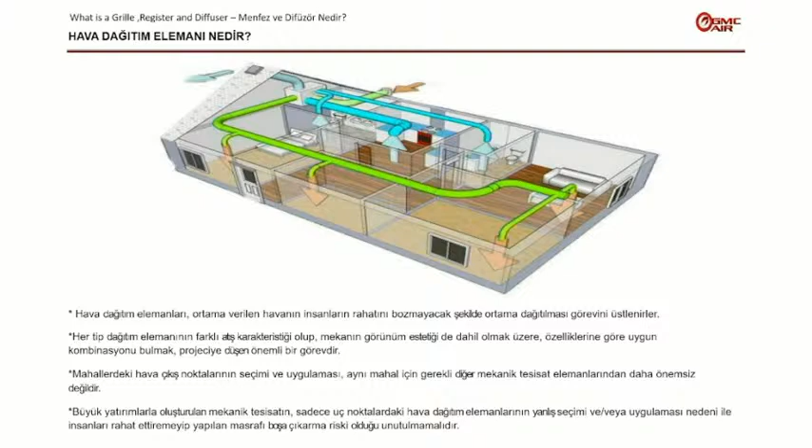It's also not working. For instance, when there's a product to be chosen between grill and diffuser, the choice is made based on refrigeration.

So you can't use this in heating, only for cooling solutions, because you have identified the wrong solution. There are some details here, but I'd like to show you something else.

If you go to many factories, for instance, or to banks, you will see some plexi materials installed in a very ridiculous way. However, they are the wrong diffuser choices. The products are wrong. However, this is how the system was installed.

They have installed a panel, they have installed the cables. However, the blowing equipment is wrong. And the end users give feedback that the system is wrong. However, if the air distribution products were chosen in the correct way, we wouldn't encounter this solution.

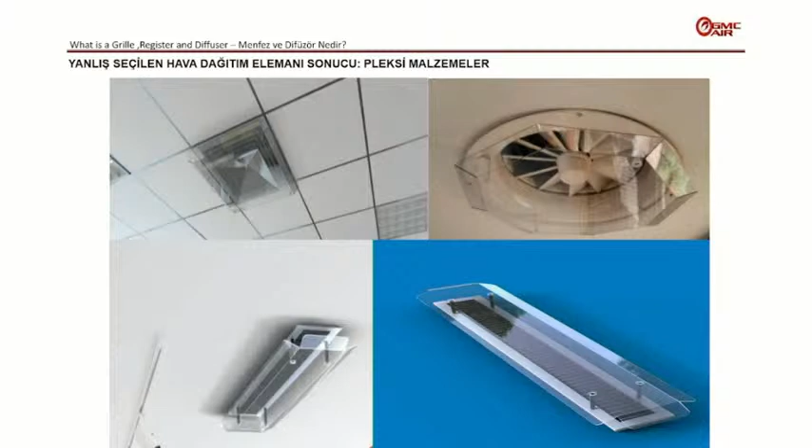This choice of wrong products created this plexi product as well, as you could see.

Let me talk about what a grill is. If there's the right distribution, you would have a grill that is with a right wing. And with the diffuser, if you can change the airflow, then it is called a diffuser. Each one of them has different use places. But when we use register, it is actually a grill with dampers.

For grills, you may have different varieties, different options. There's the distributory, there's the round channel one, many varieties. But if you're not sure where to use which product, there's a risk that the product may not be used in the right place.

One of the most commonly used grills is the one that distributes. This is used for distances of 2 meters, 2.5 meters, and they constantly blow. There's no option of directing this airflow.

So, in many projects, they prefer to use anemostats instead of this double blow. However, using this anemostat is not really ideal for 2.5 meters. Unfortunately, they just use this anemostat as a fixed solution.

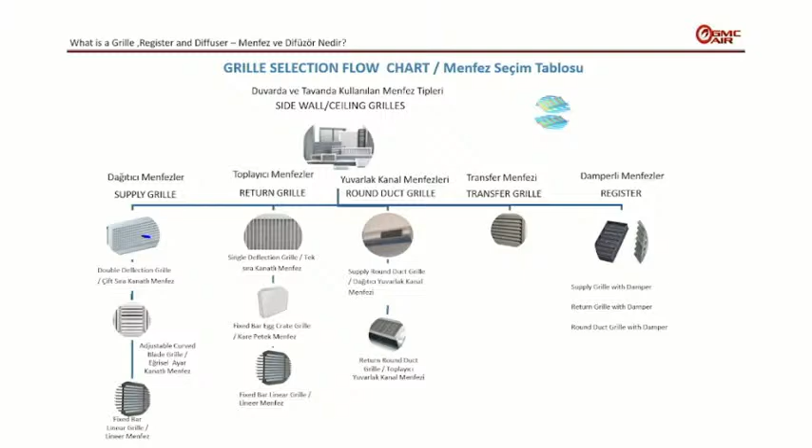And in terms of registers, which are grills with dampers, which I mentioned before, I'm moving on.

These are some adjustable winged grills. In many parts of the US, this is being used in all of the hotels and residential areas, because you can manually adjust these products and change the wings both for heating and cooling and create solutions.

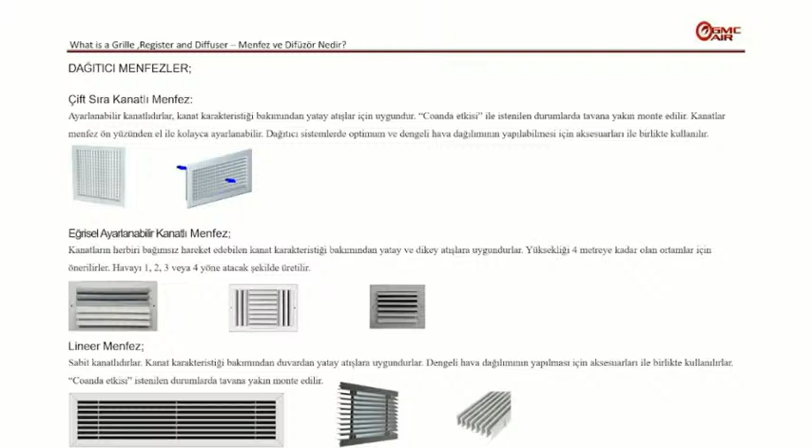However, with the grills with double wing, there's no function to do this. So when we produce for the US market, we use the linear products. This would not require you to use a damper from behind it. If you can just close it, it serves as a damper.

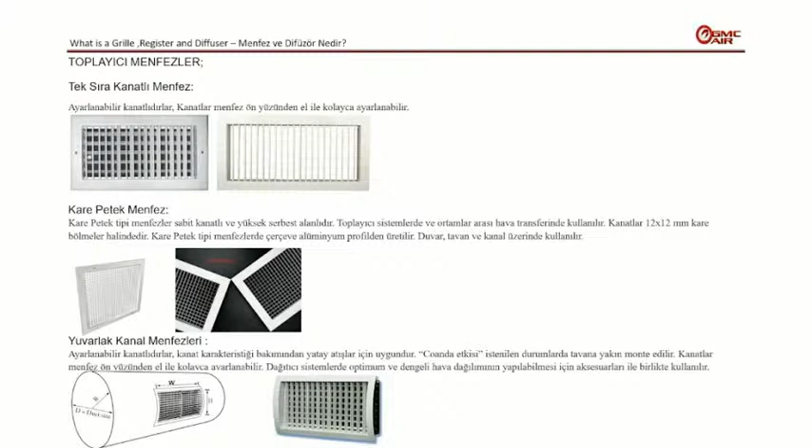And these are the grills that are collecting within the market. This is fixed. If it doesn't provide air distribution or a direction to the air, then it's a grill. If it provides a direction, if you can direct the air, then it's a diffuser.

So I'll move on to explain why we shouldn't put blow and suction at the same time. There is a Coanda effect, and I'm telling this because you all know about anemostats. When the air blows, there is a certain period when it's just suspended in the air.

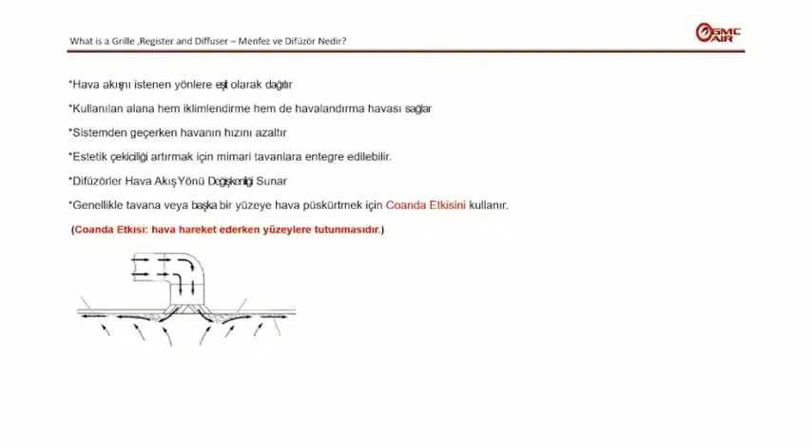And it creates a Coanda effect and directly directs itself. If you don't take this into account, the Coanda effect will come into play, and we should really take this into consideration. This means the Coanda effect is that when the air catches the surface, it continues along that surface.

And here you can see the diffuser selections, which can change from company to company. So there's the horizontal blow ones and the radial ones for high ceiling solutions.

In order to get the air from a high ceiling to down, you need to create turbulence, and you would see that high impact diffusers would be the right solution for that type of space. With these type of products on the right hand side, you can then bring the air from the top to the bottom if there's a high ceiling.

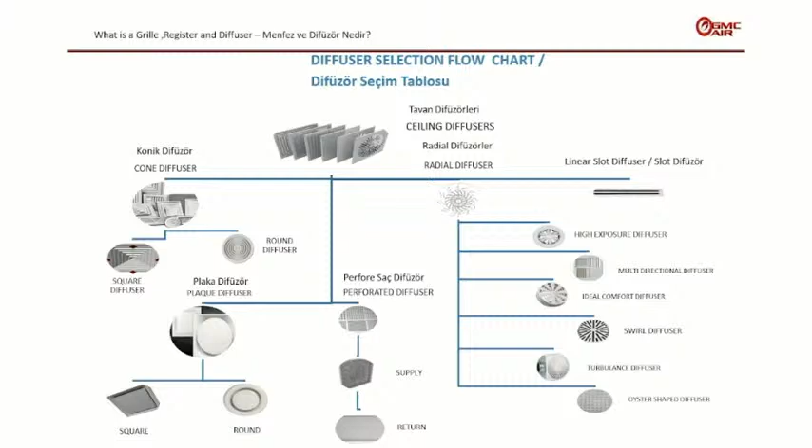If you cannot change the wings, you cannot use the same system for heating, and the Coanda effect will come into play. So when making these designs, please take into account that the grills or diffusers can be adjustable to be used both for cooling and heating design.

So I mentioned the slot before. Here's an example of a mistake. Unfortunately, it's hard to say that the slots produced for years have some mistakes, but this is the type of wing which needs to be in the correct way. So one wing can serve as a damper as well, and they can direct air.

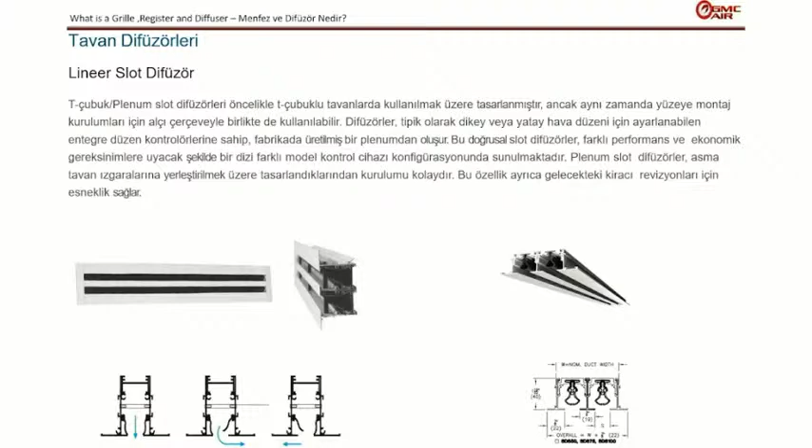We started to produce these, and now we are producing these for the US market. I'm telling you these because we have changed the whole production line, and now we have these products. However, the old ones are also in the market, so I'm trying to explain the differences. We have a lot of information, but we need to change the old habits as well.

These are the type of anemostats that we use in the US market. The key feature here is that even if there's low air pressure, you would have a stable flow. Normally, our products with turbulence wouldn't function, however, this product would be stable.

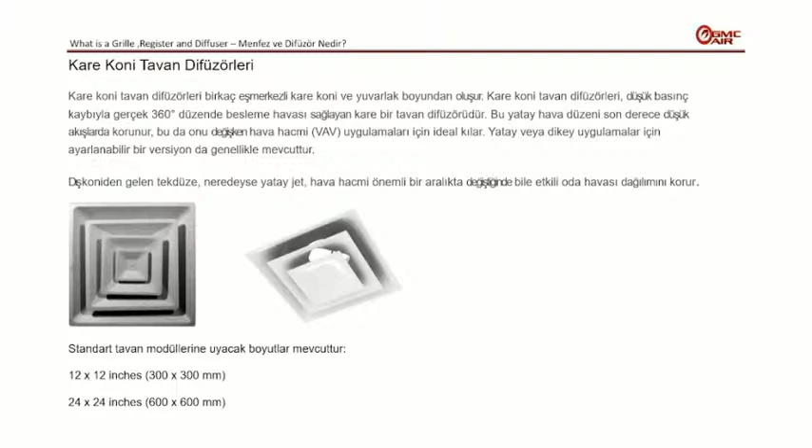And they don't have a plenum box as well. Normally, you would have this box, but they are connected directly from the flexi - directly you can connect this without the plenum box, and you can directly just connect this product from behind. It saves you from costs and leakages. It is sealed, you won't have air leakages, and it's a very economical product as well.

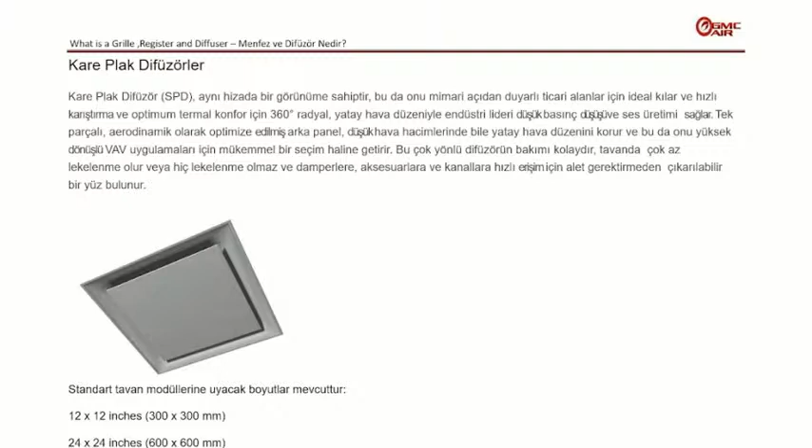And here you have a very flat square diffuser, and it has a capability to produce flat airflow. Again, it is without the box - they can be directly connected to the flexi.

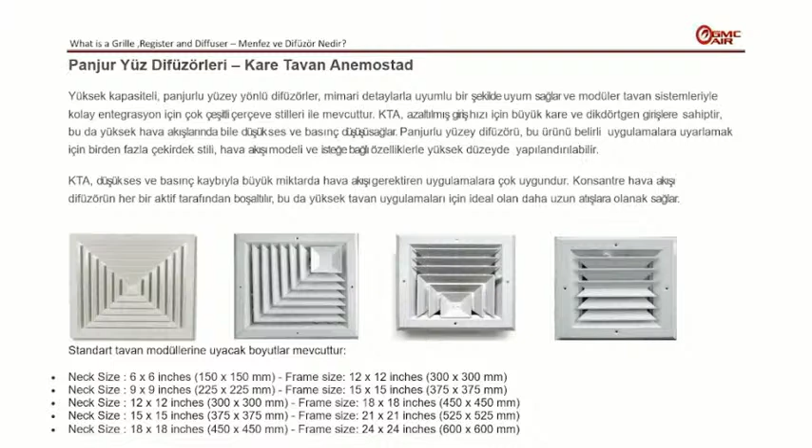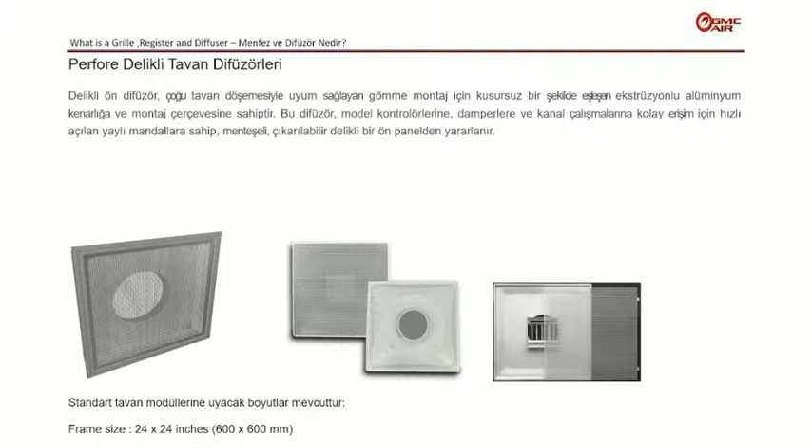And these are the products that we use that are standard and used in the Turkish market - these are the square anemostats. And you saw before, these are the diffusers with holes, and it distributes air in a homogeneous way, depending on whether you cool or heat. The perforated holes create smooth airflow, and again, you don't have the box behind it.

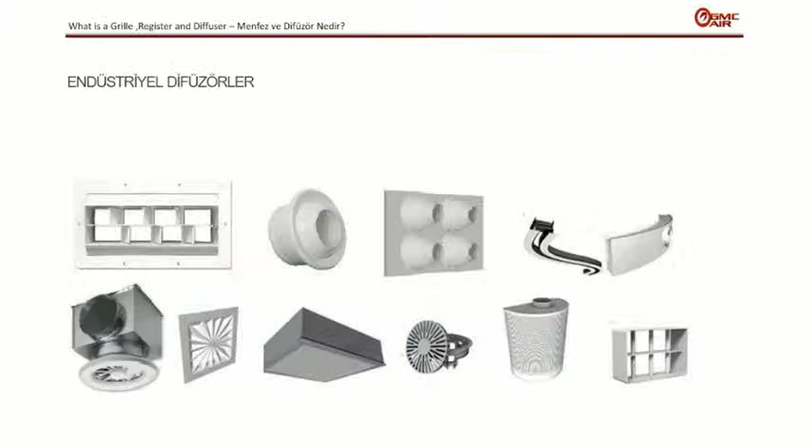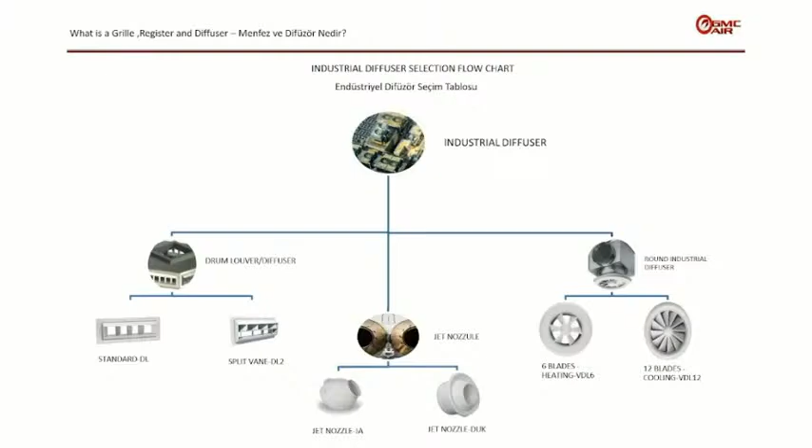Now, here you can see the diffusers we use in the market, and these are the industrial diffusers. There are many varieties we use in the industry, so we produce for the industry as well. These are the jet diffusers, and then you have the long-range products for industrial use. It is possible to use these products in high ceiling spaces. And you have this drum product - it provides a good solution when you have issues in your projects and in high areas. These are continuations of our industrial products.

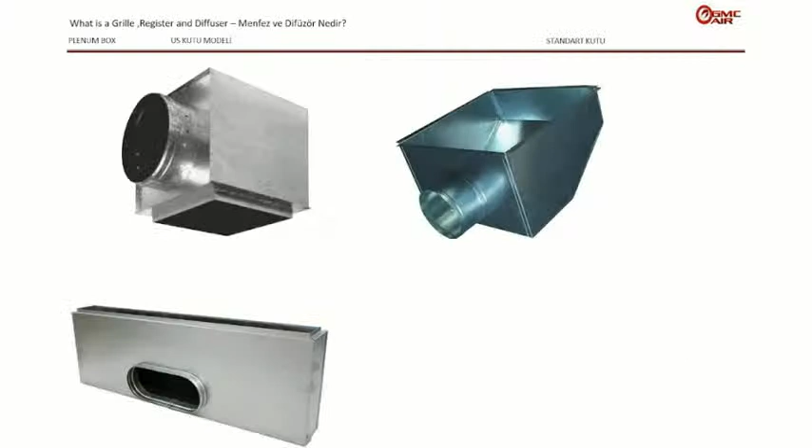Let me add as well in terms of these boxes - normally, how does it work? You put this product, you place it onto the anemostat. However, it's wrong - this is not how it's being implemented in the US, and it produces air leakages. We presented these products, and unfortunately they were rejected, and we were surprised.

So on the left-hand side, it should actually be the opposite, towards the downward side. Unfortunately, no other boxes are produced this way, and they produce 30% losses. In these systems, it is a high loss, so it would create 30% more - less efficiency if there are losses.

The same applies to slot diffusers. Normally, there would be a product, and then these boxes would be placed on top of them, but these lead to air leakages. However, if you did a hole on the sideways and direct it towards downwards, then energy saving can be achieved. Thank you for taking your time and listening to me.

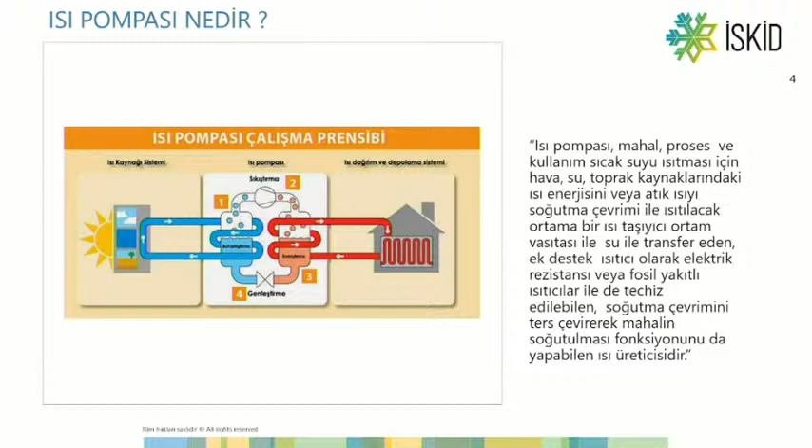Now, if we look at the types of heat pumps, we can say that there are three types: air-related, water-related, or soil-related ones. As you know, in nature, air is abundant and free.

Air-based heat pumps can be taken and used for radiators. The advantage of this product is that the service and maintenance are very easy. Water-based heat pumps use water from lakes or the main drainage as the source. If the location we want to heat is close, we install this inside the space.

Then you have soil-based heat pumps. We use soil to transfer heat, and we utilize heat-changing conduit pipes to change the heat. When we talk about heat pumps, we all understand this is used for heating. However, we can also produce usable hot water, use it for cooling purposes, and we can also use it to heat pool water.

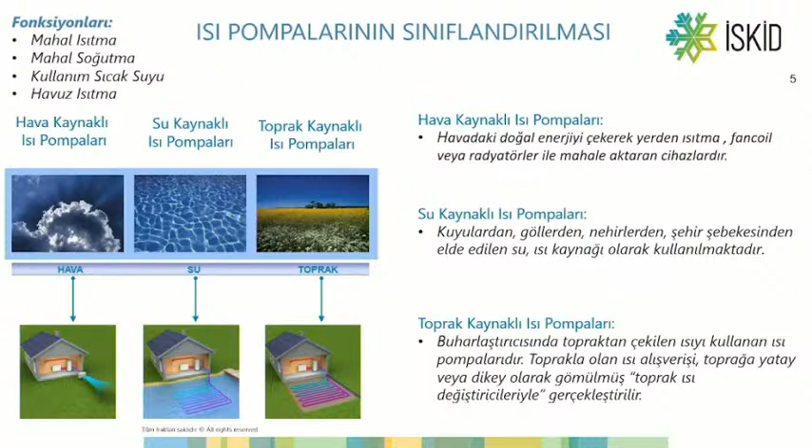Now let's look at the benefits of heat pumps. The most important benefit is energy efficiency. With technology becoming more advanced, air-based heat pumps with 1 unit of electrical power can derive 5 units of heating power, and 4 units of that power we actually get for free.

Economic benefits are also included here. Operational expenses are low. Maintenance, installation, and servicing requirements are lower compared to other systems. This is how you recoup the loss you face in the beginning. It is also not harmful for the world, as it is not based on combustion, so there's no possibility of explosion or burning.

It is open to technology innovation in the compressor and to developments in the cold fluids inside, so we will always see certain improvements along the way. It is environmentally friendly, with low emission values. It doesn't have any flue, gas, or odor, as it doesn't interact with any of it. It is environmentally friendly.

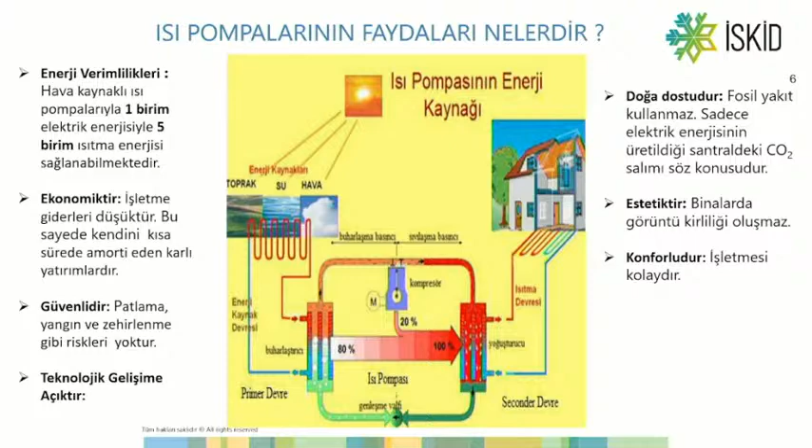We talked about some regulations that the EU has set, including eco-design and energy tagging and labeling. What does that mean for us, and how is that important for us?

Water-based heating devices in the European Union, for example, Lot 1 has been defined for eco-design and energy labeling, and this is also linked with CE tagging and eco-design requirements. This is for devices with a capacity up to 400 kilowatts, and for energy tagging, we are talking about devices with a capacity of 70 kW maximum.

Lot 1 in Turkey was published and became effective some years ago. Which devices does it cover? All water-based heat pumps, so from air to water, water to water, and soil to water heat pumps are all covered under Lot 1. It covers boilers, solar panels, and hot water tanks.

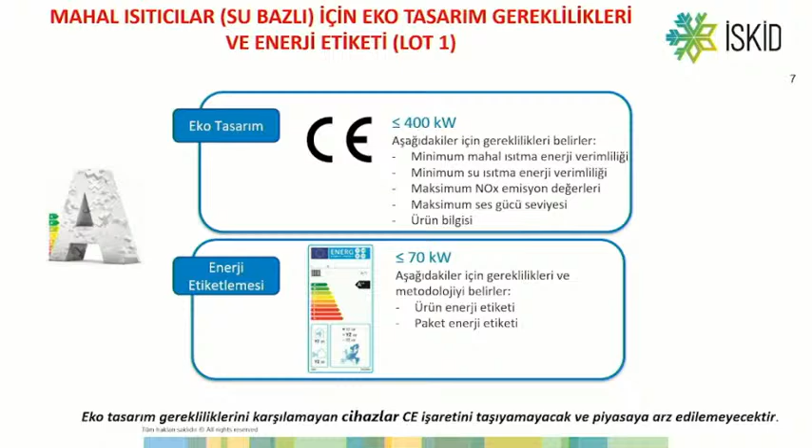As you can see here, eco-design requirements include energy efficiency, district heating, maximum emission values, sound strength level, and product information. If your device does not meet these requirements, you cannot obtain CE certification, and this is how you cannot put your device on the market. So your device will have to meet these requirements at minimum.

With Lot 1, the definition of energy efficiency has changed as well. It only depended on a single temperature point to calculate energy efficiency, but seasonal efficiency has been put forward as a new definition, in opposition to nominal efficiency, which turned out to be inaccurate. Seasonal efficiency does not only focus on a single temperature point; it looks at the entire heating season, together with full loads, and the efficiency in partial loads as well.

So this is how we understand the importance of inverter technology. And what does that mean? It adjusts the compressor and rotating frequency in a sensitive manner.

It prepares it and adjusts it according to the load in the environment, and it brings high energy efficiency.

After seasonal efficiency, we have seasonal space heating energy efficiency, which has also been defined as eta-S, with eta-S and SCOP, the primary energy factor, has been put forward. The reason behind it was that everything has to be denominated in that, so this is how we can have fairer comparisons in terms of energy efficiency.

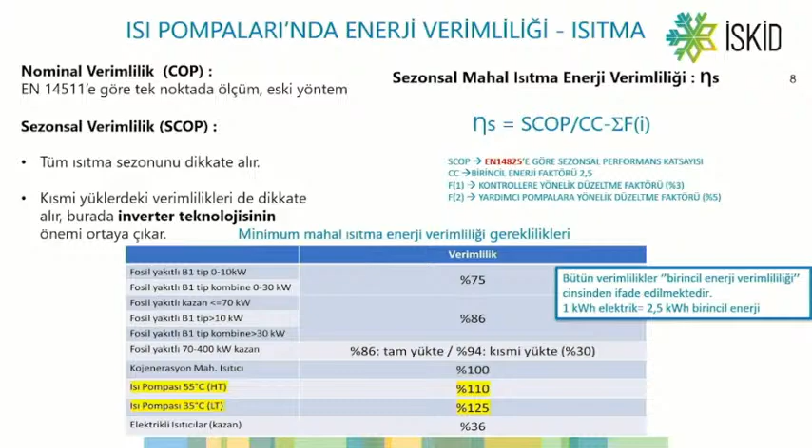Here on the screen you can see minimum local or district heating energy efficiencies. When you look at heat pumps, you see high temperatures, and you have minimum values for energy efficiencies. Any device you produce or import, if it doesn't meet the requirements of energy efficiency, you're banned from putting it on the market.

Energy labeling samples have been effective since September 2019 in Turkey. The ones you see on the left are heat pumps with district heating only, and the one in the middle with combined heaters together with district heaters are heat pumps that help us have hot water, and package type heaters. The tagging for that is related with solar panel, temperature control device, and hot water tank. This all includes these items, and these will all be displayed on this tag and label.

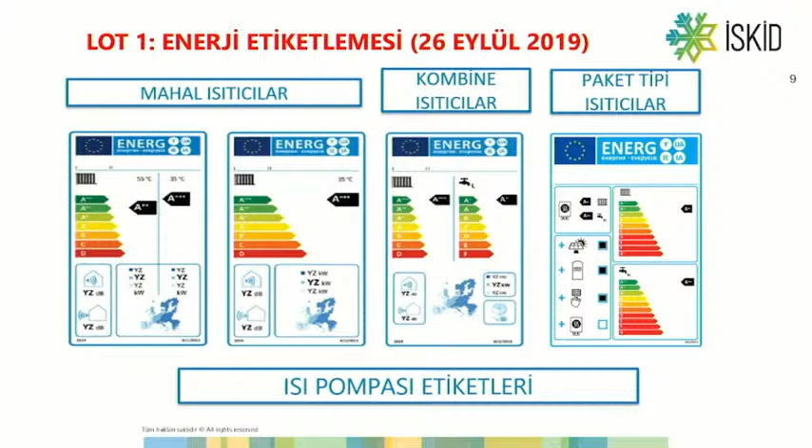So the heat pumps that already have efficiency, we want to improve their energy efficiency with additional features, and this is how we display them here.

Environmental policies of the European Union are quite ambitious, with emission reduction targets, and the war between Russia and Ukraine and the hike in natural gas prices were also factors. End users now focus on highly energy efficient and more environmentally friendly heat pumps, so they're more interested in such a transition. The European Union would like to facilitate this transition, and that's why they offer certain subsidies. We're going to look into that in detail. For energy reliance, in order to reduce it by 2030, 60 million heat pumps have been set as a target within the European Union.

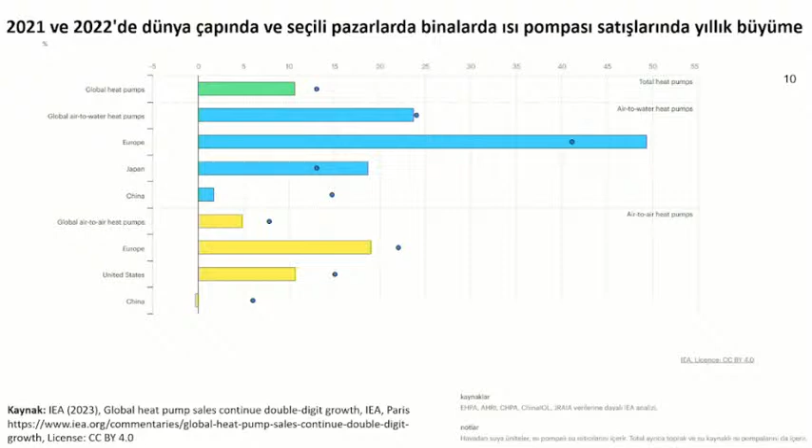While the inability of the market to grow at a sufficient level has many reasons behind it: in Turkey and in many regions, we have natural gas. In Turkey, unfortunately, we don't have an adequate level of subsidies. The fast increase in foreign currencies also has a negative impact on the first investments, and this basically pushes buyers to natural gas based devices.

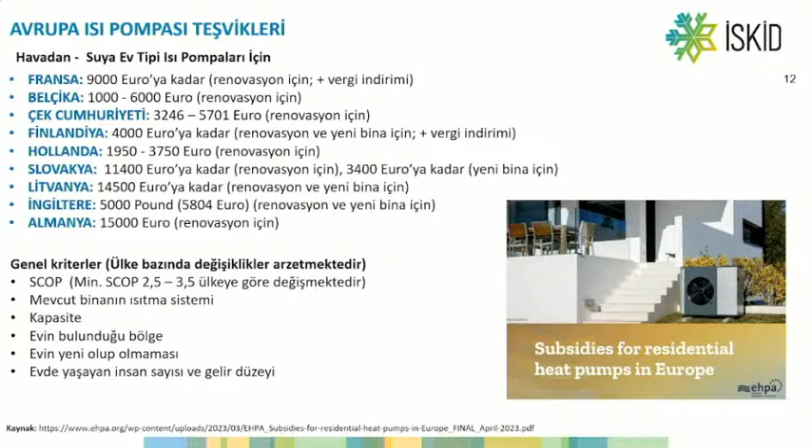Thank you very much, dear Andaç, especially for the situation on the ground in Europe. Thank you for that insight. For heating, we use fossil fuels, and 99% of it we import. So we are quite reliant on imports as for energy, and heat pumps are quite important in terms of self-sufficiency.

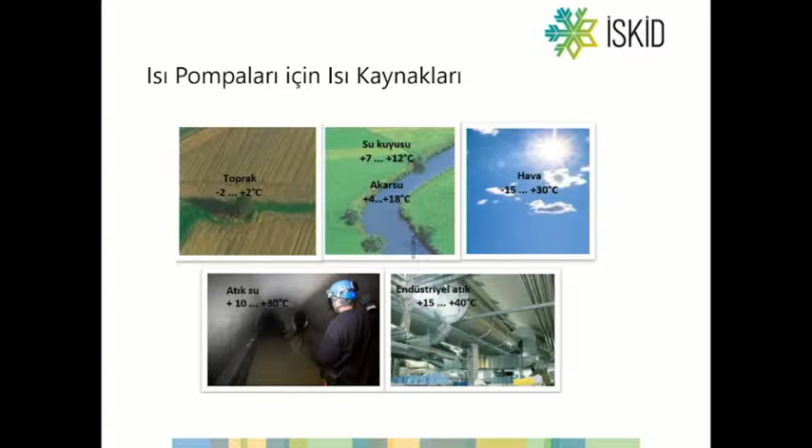I will talk about air-based heat pumps and its applications. First, the resources Andaç mentioned, but let's have a look at it in further detail. Heat pumps improve their energies with natural resources, and they then turn it into district heating. We have three different sources: soil, air, and water. But we see different developments in the world, so air-based heat pumps have become popular. And after the war between Ukraine and Russia, we've heard district heating solutions as well. This is why heat pumps have become important.

As for applications, we'll see three main methods. We have collectors and wells for heat pumps, and in Turkey for households it is more limited in number. And as for plant installations, higher buildings and shopping malls, you'll see these applications. I mean the soil heat pumps.

As for water-based heat pumps, wastewater, to evaluate wastewater coming out of factories, or using it in process heating or district heating purposes could be an application. And for hotels, district heating.

And then we see also air-based heat pumps. Compared to all other applications, you see the greatest difference for the primary side. It doesn't require any additional application. It's easiest to use. So you can take air from the exterior sources, and together with internal fittings, it can climatize, cool, and heat water. So this is the most popular.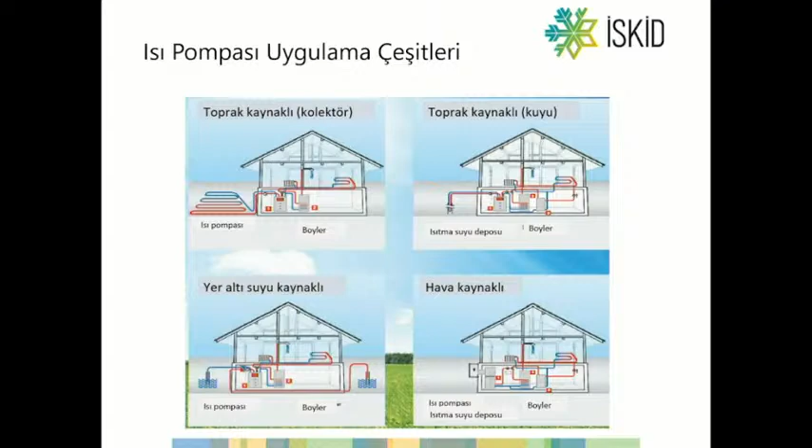And functions and applications: what can we do with heat pumps, really? And what kind of systems can we install? What kind of controls can be carried out there? Well, we can control the heating circuit. We also can check buffer tanks. We can check the temperature of buffer tanks. Well, external request prompted operations, for example, and we can have hybrid operations, natural gas driven boilers, and heat pumps.

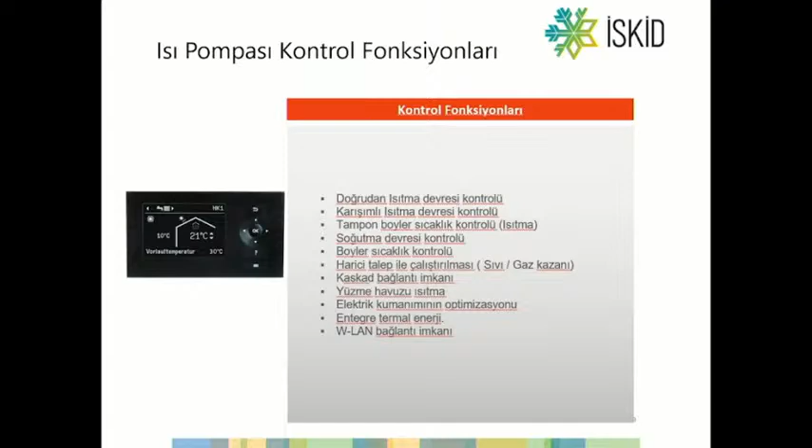Can help us check the process, we can heat swimming pools with electricity optimization. Photovoltaic panels can be used, and coordinated rooftop panels can generate more efficiency with the help of heat pumps as well. So this is how we serve the intended purpose, basically designing buildings with almost zero consumption of electricity.

And for general use water, we have some connectors. As long as there is solar power, the water for general use is going to be heated with that, and when solar power is not available, heat pumps will be addressing that need. So we have such systems in place, and some household applications in Europe. Thermal solar collectors have been replaced by photovoltaic solar panels, to heat the water for general use, together with heat pumps for sure.

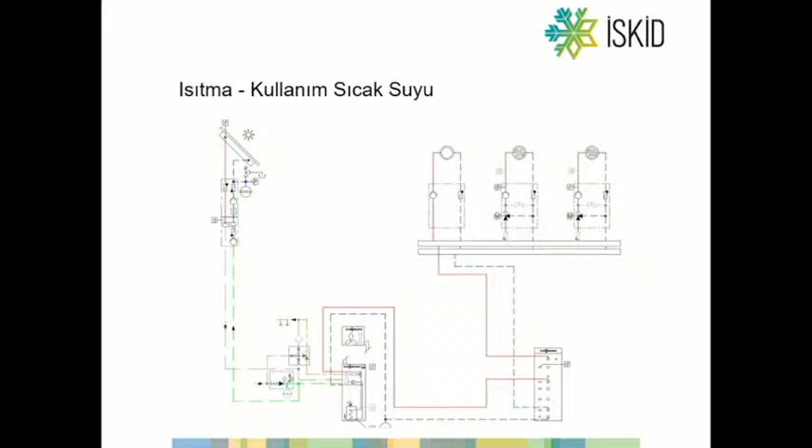And what's important here is that heat pumps can basically quadruple the energy efficiency up to 4 times, and photovoltaic panels for 12 months - when we dimension them, when we think about a process of 12 months, you can basically maximize energy efficiency with heat pumps. So thermal collectors can be replaced by photovoltaic panels.

If you cool domestic water, you can use heat pumps for two different purposes. The first is if you want to cool the water, you can use fan coils. You do it with water up to 7 degrees temperature. You can operate fan coils and feed the system this way. This is one of the diagrams.

I'm not going to call it cooling, but this is basically floor cooling, imagine from the floor heating systems. So you can basically have different dehumidification systems, because when the relative humidity reaches a certain level, normally heat pumps can do the feeding up to 7 Celsius degrees. But as for ground cooling applications, you need to look at the relative humidity, and feeding can be done with the heat pump up to 20 Celsius degrees if the building is designed in a way to be ideal for ground cooling.

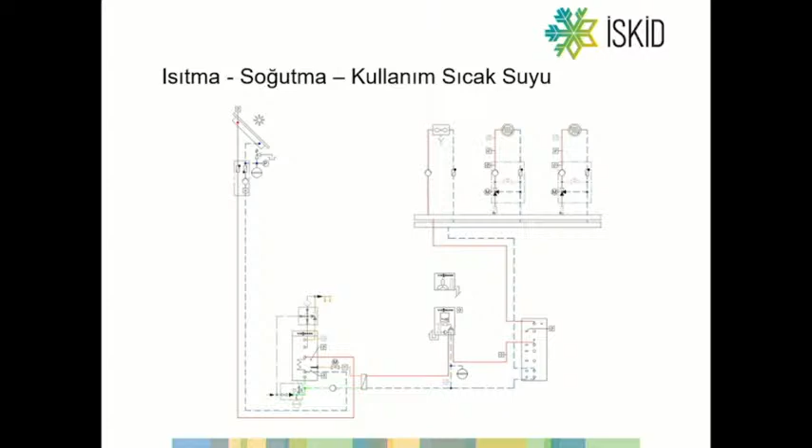This also allows us to control the air, but if you want to have full control, you may add fan coils to be used in cooling and heating, or you can also carry out radiators for buildings where we have modernization, and fan coils can be used for cooling purposes in that particular example.

Heat pump control functions: external demand, while with a natural gas boiler or with combis, it can be operated in a hybrid fashion. Heat pumps can run in two different versions. Here is the diagram. The buffer tank is here, and you see another fitting here.

So you can basically run them in two ways. The first is related to the highest COP efficiency. When the exterior air is above 5 Celsius degrees, the heat pump does the heating of the building. If that is not the case, it is deployed together with the boiler itself, and it aids the boiler. The output water temperature can be at the level of 50 or 60 Celsius degrees, as long as it is the case, because the exterior air can change, and this is how the outlet water can change.

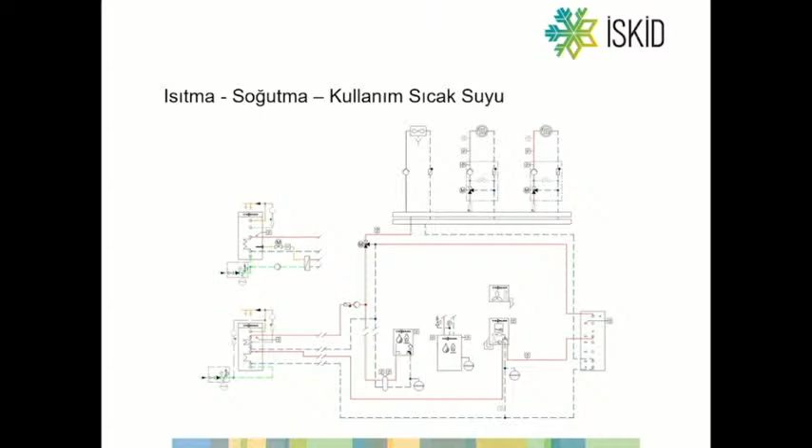Of course, exterior air has a huge impact for air-based heat pumps. So the designed temperature should actually fit the exterior air, but it is also possible and viable to operate them with boilers. So only a few readjustments in the entire system will enable you to modernize or repurpose the heat pump existing in the building.

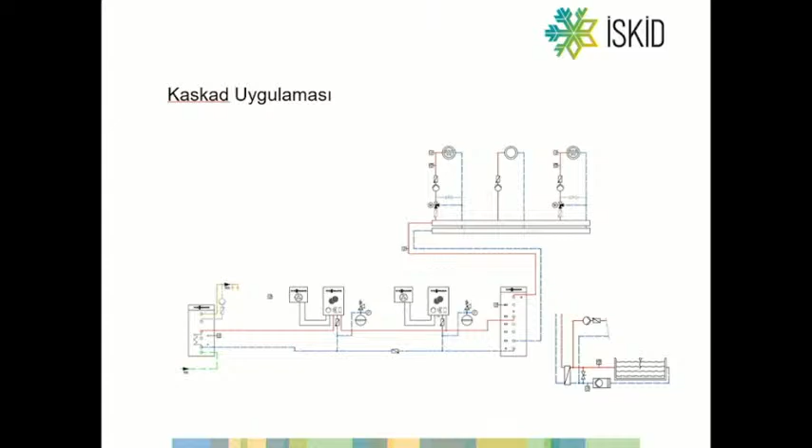Cascade applications, so power unification methods we can follow here. It depends on the brand, so how many cascades you're going to do and what's the need of the building. Such applications can be done for domestic water temperature or the heating of a swimming pool in the building. So cascade power unification models can be deployed here.

Applications requiring or involving heat recovery, this is a method followed by hotels, for example. Heat pumps, as they do the cooling together with their cycles, the cold fluid inside carries the heat, because normally heat pumps basically act as exchangers between temperatures. So as it does the cooling, with a second exchanger, the heat recovery can be attained and the domestic water can be stored this way, and this is why it is used in hotels.

And what about its benefits? One single device, and you do the cooling with it and you do the heating with it, and instead of using two separate devices, you use only one device, and it is basically low cost for you.

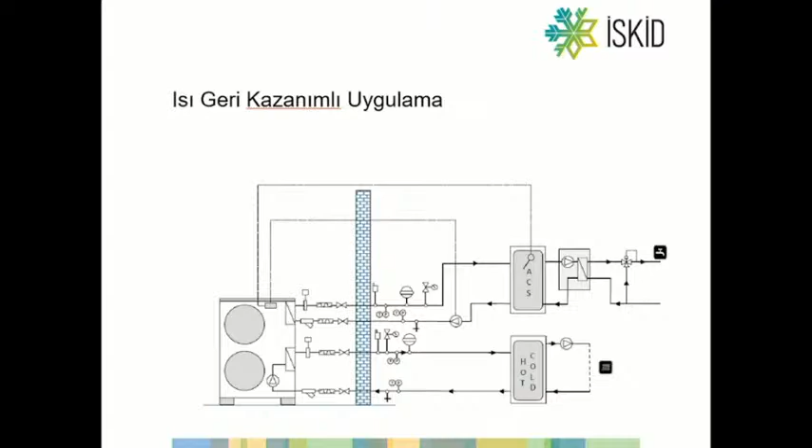Last but not least, from the very beginning of my speech I was emphasizing energy efficiency, especially electricity, but hybrid adoption of heat pumps made them even more meaningful. So with photovoltaic panels, I would like to talk about own consumption and surplus production and feeding it into the grid. Regulations like that have been established in Turkey. For the household side it's a bit slower, and with incentives in industrial applications you can see photovoltaic systems in factories.

But for heat pumps and photovoltaics, we don't really have regulations that allow household practices, but this is how the world is headed, this is how the systems are headed, and I believe that regulations will be established for household applications as well. Heat pumps, well, like other electric devices such as washing machines and dishwashers, basically consume power. Together with own consumption, it is important, together with photovoltaic panels.

In Turkey, as Arslan was saying, the greatest portion of our foreign deficit comes from our need for electricity and energy, natural gas and oil. A key issue with these is basically their unavailability in Turkey, so we import these sources, and these systems allow us to address that.

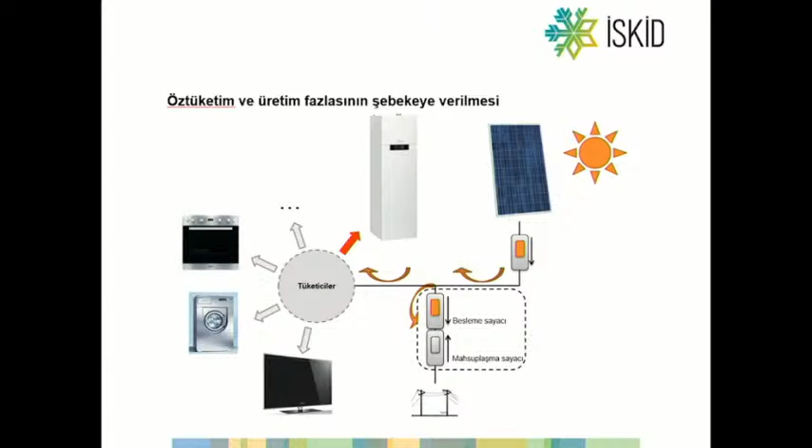We've seen an example of this with the war between Russia and Ukraine. Natural gas supply was limited and constrained, so heat pumps and photovoltaic panels were put in place. We started using decentralized systems, where our house can act as its own center where energy is generated automatically. If you derive the power that the heat pump consumes in an environmentally friendly manner, you address the problem of CO2 emissions, and this is going to be even more important in the coming years.

So very briefly, I'd like to share an example with you. Take a 10 kilowatt photovoltaic panel—this is the voltage. If you want to convert it to alternating current, we use inverters, and electricity is generated. In order to heat a household, the ratio is basically 1 to 4: 1 unit of energy can be increased to 4 units of energy. This is how you address the need for energy.

But you may ask, on days when it's not sunny, how is that really going to work? How do you dimension the photovoltaic panels when there isn't additional space on the rooftop? You need to think about it in 12-month terms, because photovoltaics will be more productive in summer. When you look at the entire year, the losses and the gains, that's how you understand the full benefits of the system.

There are things to be considered for efficient practices, especially when installing air-based heat pumps. One is related to diagrams, like buffer tank applications. I work with some dealers in my own company, and I've heard from project developers that buffer tank application on the household side is sometimes ignored, and we sometimes fail to understand its importance. Without a buffer tank, heat pumps are just connected directly to the installation.

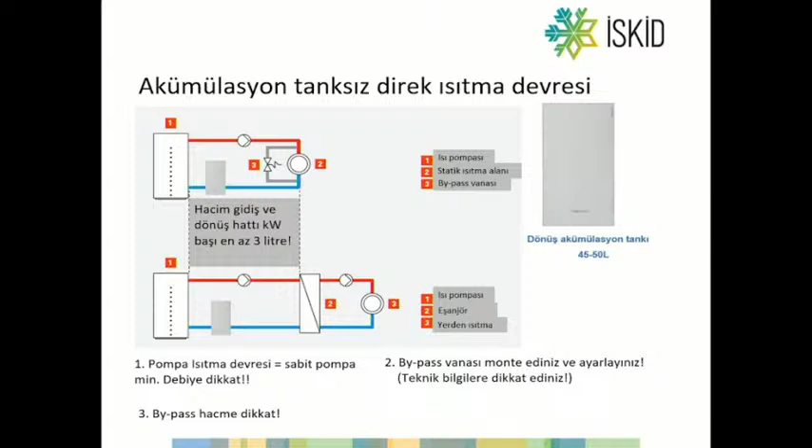I'd like to talk about its importance, because if you look at it in a traditional fashion, a combi boiler is planned with 15 Celsius degrees of delta T, and its operating ranges are flexible. In district heating, for example, you won't really have a problem, but for heat pumps you need to look at the catalogs—they operate with 5 Celsius degrees of delta T. For the device to run efficiently, you need to consider its life cycle too, and the temperature difference for inflow and outflow needs to be taken into account. This is why buffer tanks are important.

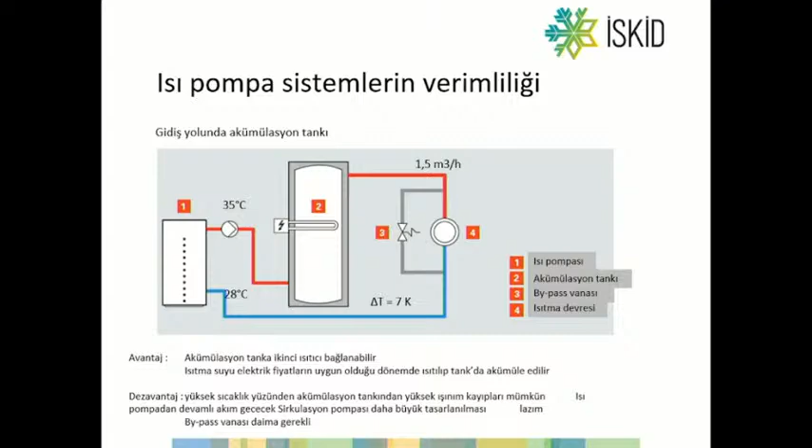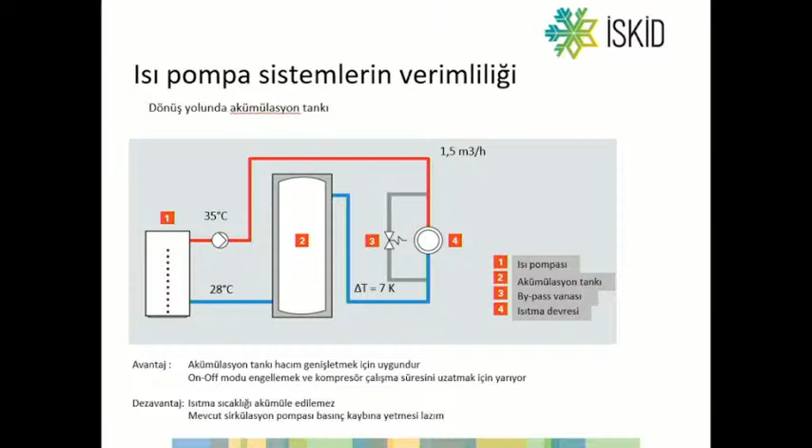Buffer tanks can be connected with 7 degrees of delta T, so 28 Celsius degrees of outflow. You can support it with electric resistance too, or expand the volume of water for the return, because capacity-based and model-based minimum water volumes are at stake. You need to check the catalogs and understand the service requirements. This matters for modernization projects too—when you put heat pumps in, the radiator meters and the water retention capacities may not be adequate. So even for that, buffer tanks are important, otherwise the water pumps may fail.

The most important application is how you use the buffer tank. For ground heating practices, with delta T at 5 Celsius degrees, how do you really warm the household? You probably won't be able to do it only with heat pumps—the buffer tank on the primary side is important to reach the delta T there. What's correct is to use it, and on the return water, you basically soften it. So on the primary side you attain 5 Celsius degrees, and on the secondary side you attain 7 Celsius degrees.

So a 5 degree Celsius difference in the heat pump is how we make sure it's consuming less electricity. The heat pumps will operate at 10 degrees for sure, but the compressor will have to use higher levels of pressure and higher temperature, and this will basically eat away the life cycle of the heat pump. The exchanger, for example, is going to be even more tired.

We're not using heat pumps for only 3 to 5 years. We are going to install them for periods of 20 to 25 years. In order to attain this life cycle, you need to take these precautions.

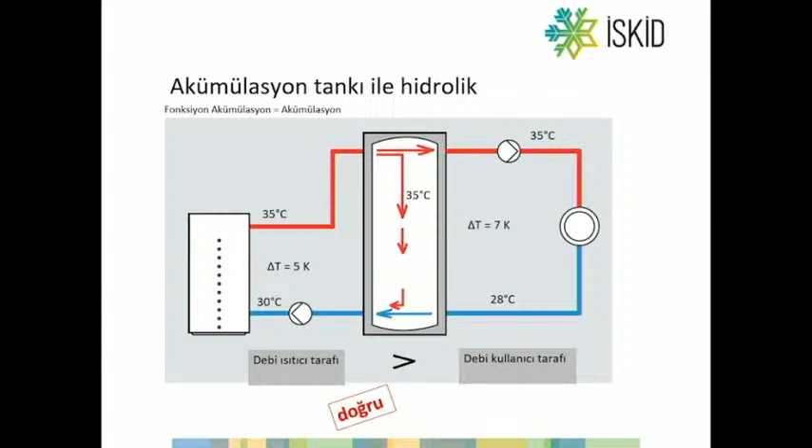Welcome, thank you. I will talk about the water and soil-based heat pumps, and my presentation will be based on visuals, and at the end I will try to answer your questions.

As Andaç Utkan mentioned, heat pumps include a wide range of definitions. It can be from air to air, air to water, water to air, or water to water heat pumps. You have the condenser side and the air side. When we say air to air pumps, you have air conditioners, split air conditioners.

From air to water, you have air-based heat pumps or air cooling heat pumps, and from water to air, you have WSHP and others, and from water to water, you have water to water heat pumps or water cooling heat pumps. When we say water to water, you can have the device using water sources, and at the building site it is heating and cooling the water, both for the condensers and evaporators.

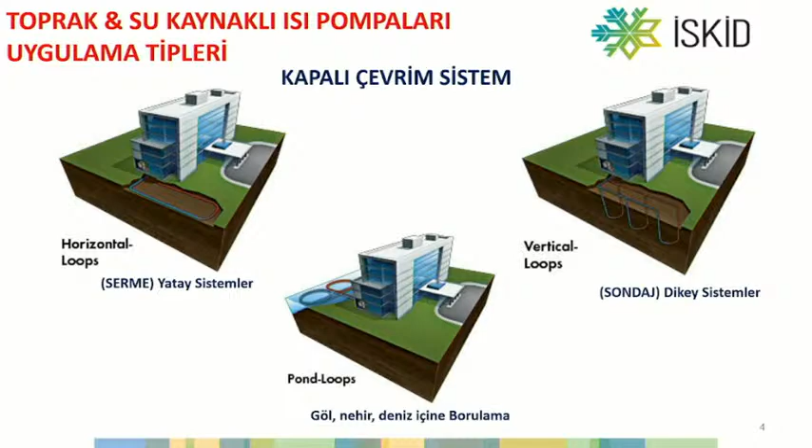And when we come to soil-based systems, the soil side is a closed circuit. Water is distributed within the pipes that are under the soil. There will be horizontal applications and vertical applications.

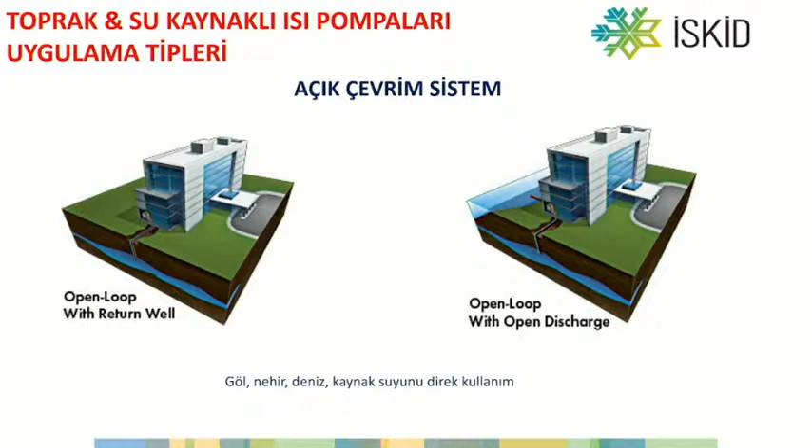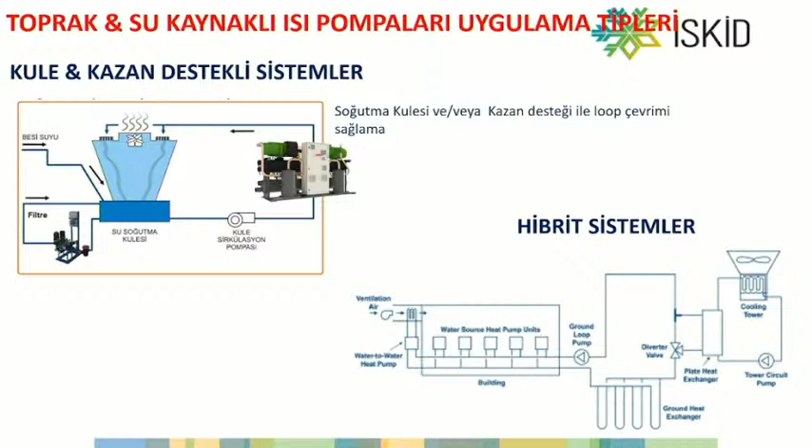Another system is the open loop system. As you can see, this is where we use seawater, river water, lake water, or water you can use directly from the source. Then we have systems based on towers and boilers, and you can support these systems with a cooling tower, or alternatively we have hybrid systems that use both soil-based and water-based sources. You can combine these 2 systems.

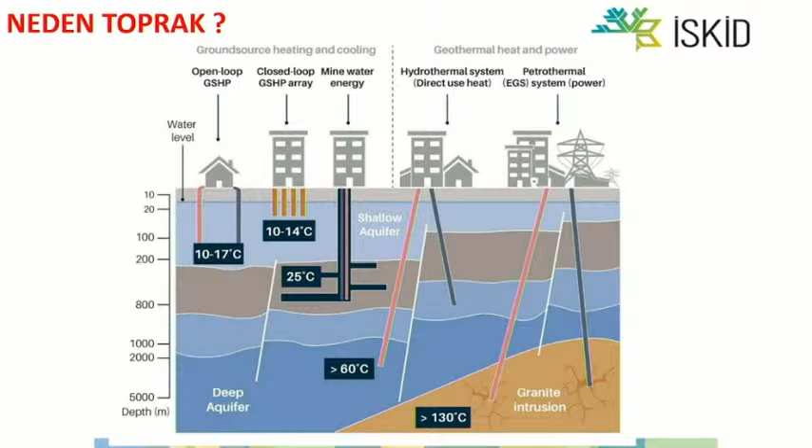And why soil? Because soil can capture heat between 10 to 17 degrees, in gradual meters - the first 100 or 200 meters are where we are interested. When you look at the soil heat, it changes depending on the depth of the soil. At 5-6 meters, the soil temperature is around 17 degrees, both winter and summer.

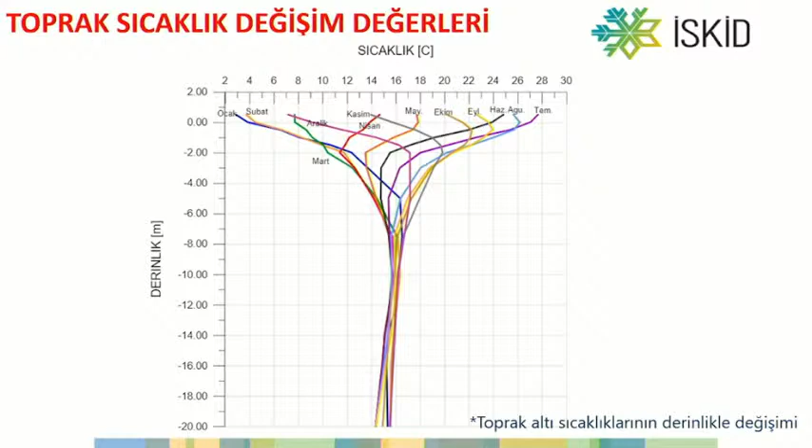So we will be using this heat. The key feature of the soil-based heat pump is heat transparency. The more humidity the soil has, the better it is in terms of transmitting this heat, so we prefer humid soil. It's also important to have the correct distance between pipes, the filling material, the type of pipes, whether U-shaped or other shapes, the distance between wells, and the drilling distance.

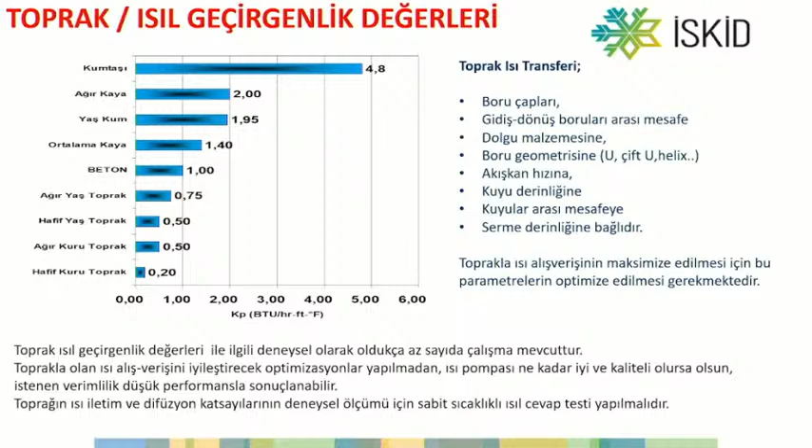These are many parameters that have to be optimized correctly. When you look at these values in terms of soil types or transition of heat, there's no standard. For this reason, before making any application, we make a drilling and measure, applying some thermal tests in order to identify the values, because there aren't standard values.

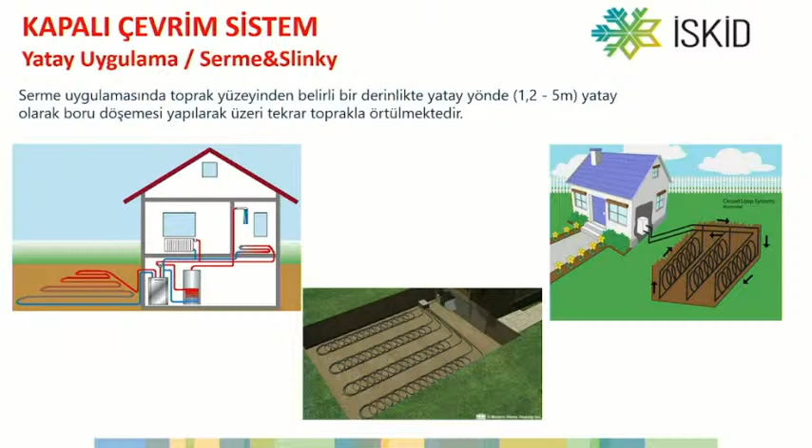You can see the visuals here, and this is the application of a horizontal lying. Pipes can be laid down horizontally or in a vertical way using surfaces.

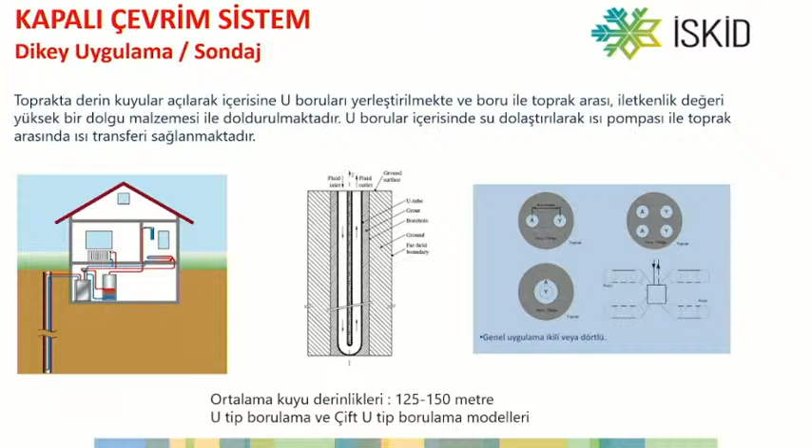And in vertical applications, we use U-shaped pipes for 100 meters of depth, and we use these wells. We fill them and we use them for heat exchange. Again, there are some variety of applications here.

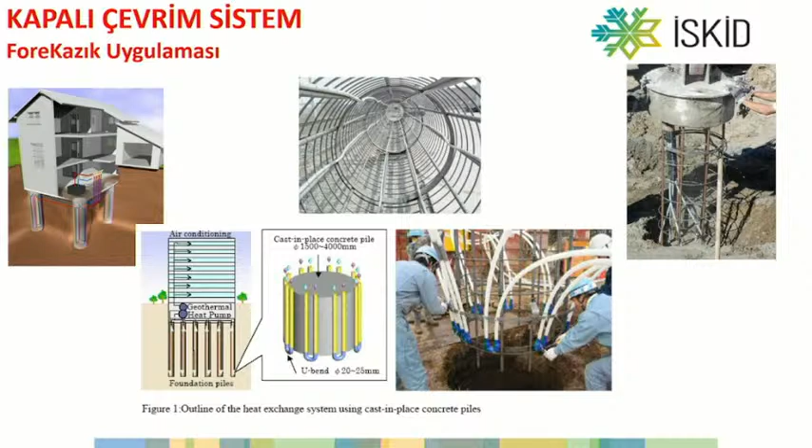Another application is that, as you can see here, if there are already some piles under the building, we can utilize them for this purpose.

The advantages of these systems are high energy efficiency, not being affected by external air conditions, low maintenance cost, and being environment friendly. However, the cons include high initial investment cost, lack of sufficient space under the soil, lack of sufficient subsidies, and balancing the burdens for heating and cooling. So these should be evaluated on a project-based, case-by-case basis.

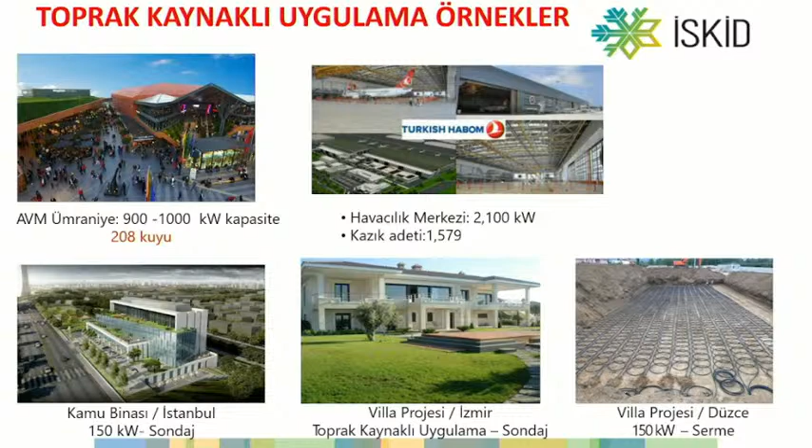When you look at the applications in Turkey, you can see a 1,000 kilowatt capacity shopping mall in Ümraniye, an aviation centre project, a public building in Istanbul, villa projects, and many other different applications.

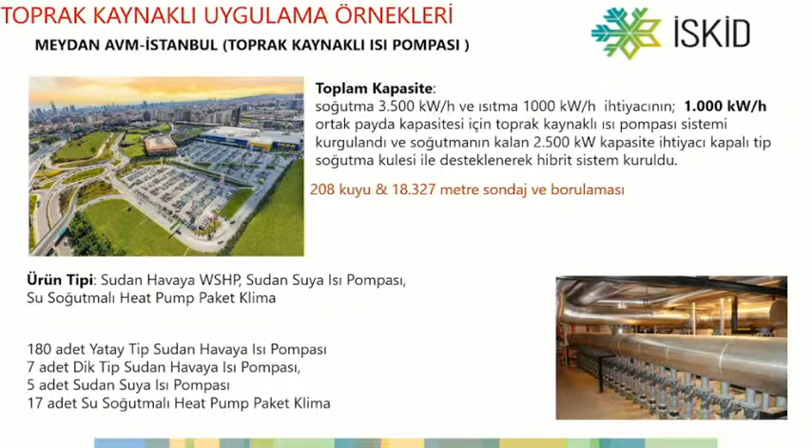When we look at Meydan shopping mall in Istanbul, it was the largest soil-based application, and it was a hybrid one. In total there was a drilling of 18,000 meters. We used all other models from water to water, and then air conditioners with water cooling, using all different models and different types of heat pumps in this project.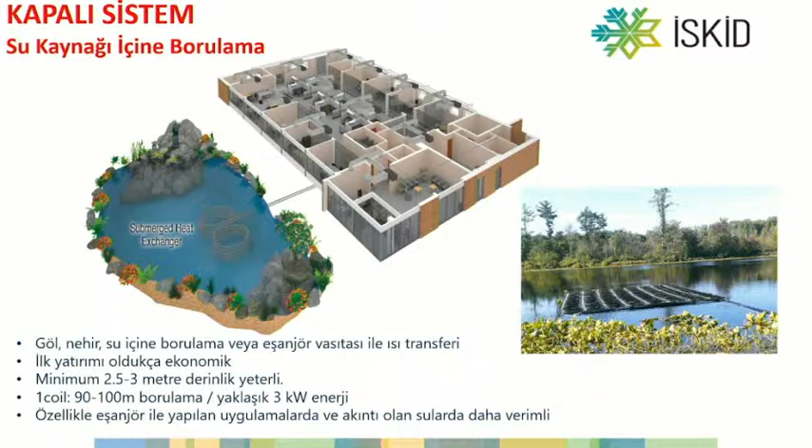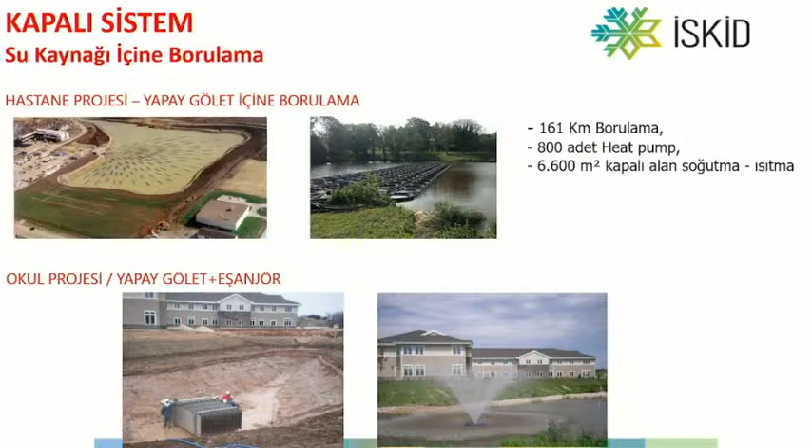Another system includes this: although we don't have many applications in Turkey, if you have a lake nearby you can install pipes underneath it. Here you see a hospital project at the top, and at the bottom a school project, whereby artificial lakes have been created and underneath, pipelines have been mounted for heat exchange with soil.

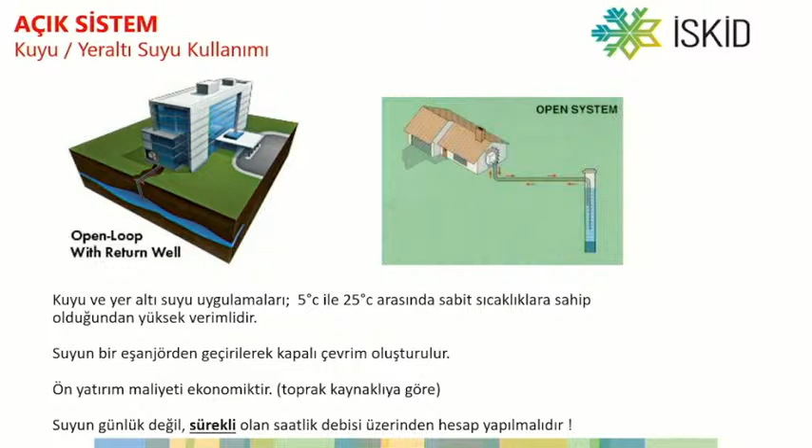If you have a well, you can use well water, and these types of water will have a fixed heating effect. The most important part here is to have a steady flow of water, so it isn't just ad hoc, but you should be able to continuously draw water.

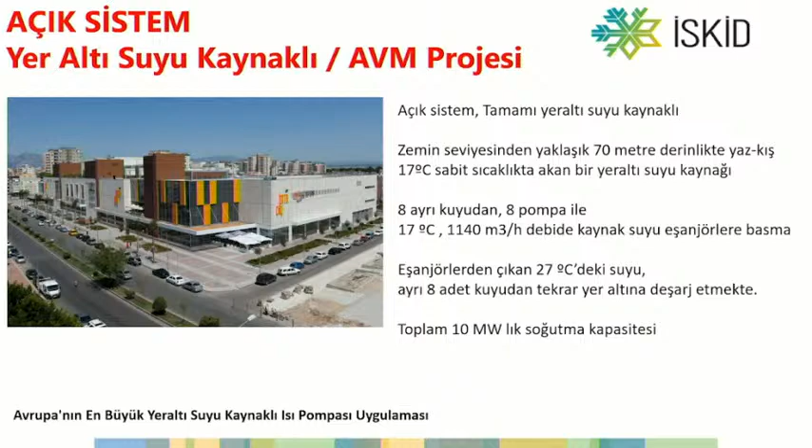Another project you will see is the largest project in Europe with underground water sources. It uses underwater from the ground, with around 10 megawatts and 1,000 flow rate capacity, and it supplies the entire shopping mall, all of the devices now provided by these underground water sources.

And then you will have the sea applications. If you are near a sea, for instance, you will have seawater temperature in the Aegean Sea between 14 to 25 degrees. In the Marmara Sea, you will have 26 degrees. And in the Mediterranean, you will have up to 30 degrees sea temperature.

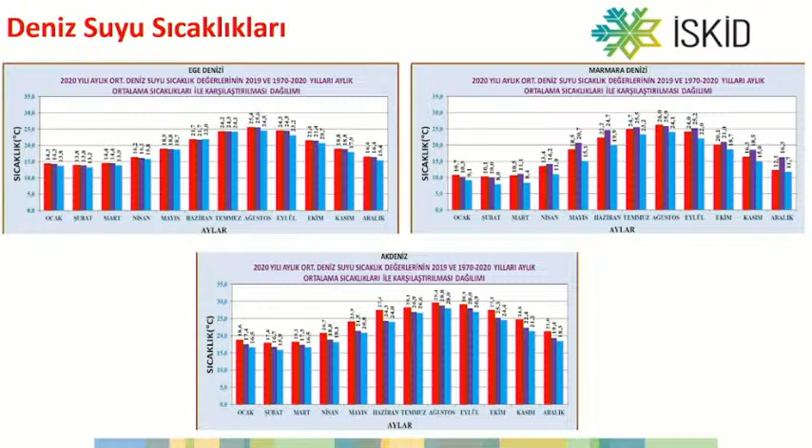If you have a source like this, you can use the seawater. In sea-based systems, we take the seawater and it goes through a device, coming through a certain depth. The key is that first the seawater goes through a self-cleaning filter, and then goes to the exchanger.

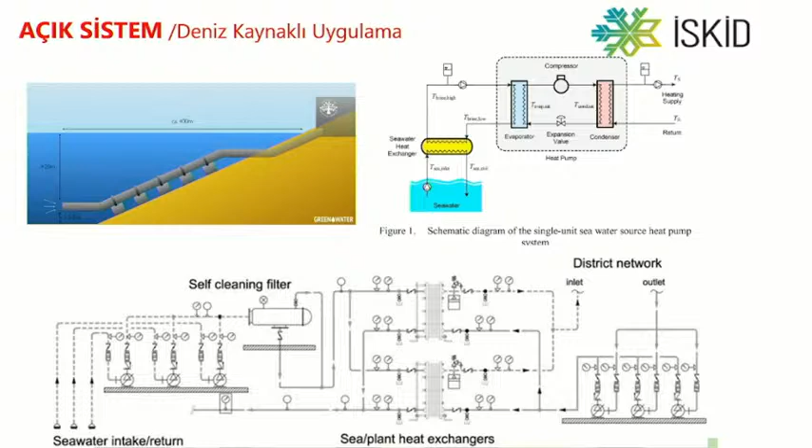And this is one of the applications that we make. These use heat pumps with 6 pipes, water-to-water heat pumps, and this is in Istanbul Metropolitan Municipality, used both for administrative buildings and other use areas.

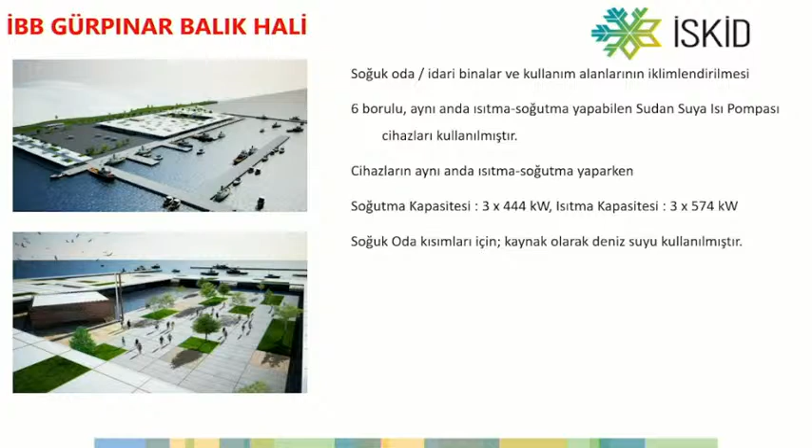After we decided to use heat pump systems here, we were thinking whether we should use the seawater or support it through the cooling tower. As a result of the study, we identified that if we use seawater, 200,000 euros would be the cost annually. And if we use towers, the cost would be 315,000 euros. So there is a cost saving.

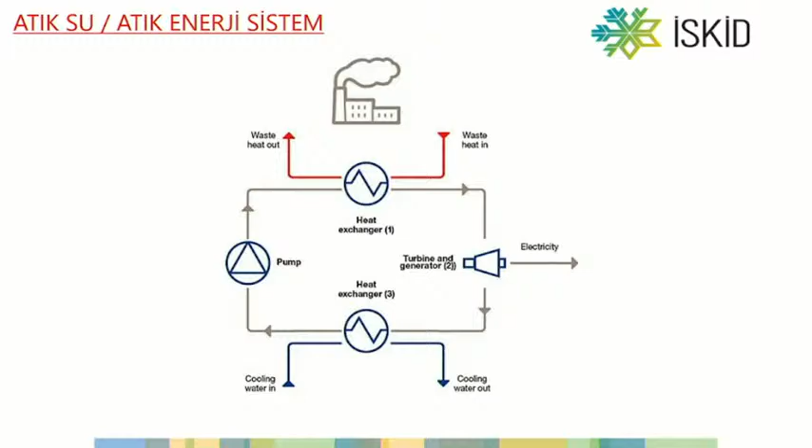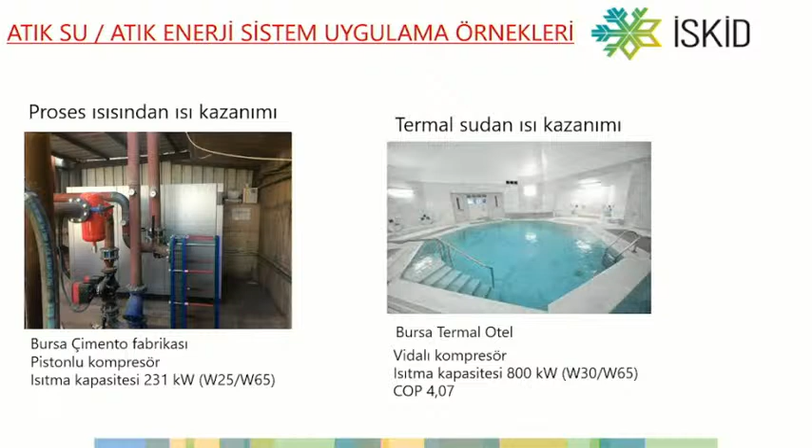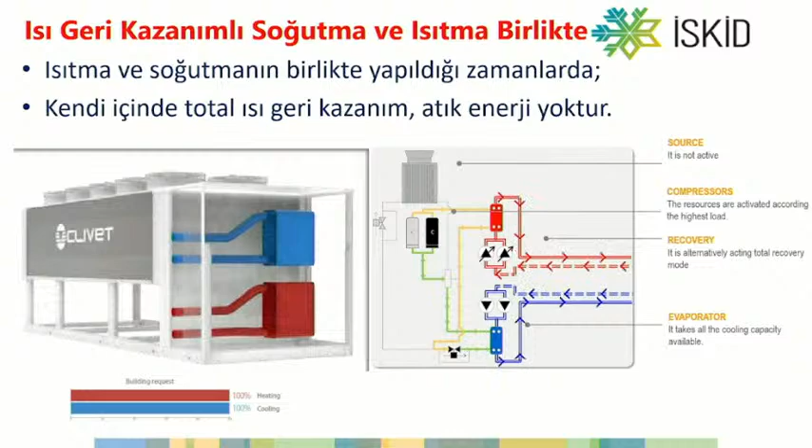Another application is wastewater. If you already have wastewater, you can use a heat pump to utilize it. This is from a cement factory in Bursa city. By using this compressor, we achieve a higher degree of heating, with multifunctional heat pumps. Here, the key is that when we do heating and cooling at the same time, the device achieves 100% regeneration, meaning the warm water is created for free.

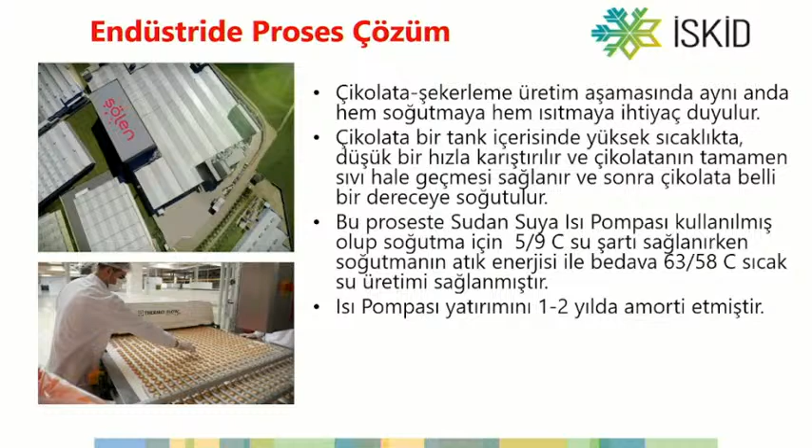This is an application from a chocolate factory within industry applications. This ensures both melting of the chocolate and cooling to fit into molds. On one hand, cold water is used at 5 to 9 degrees, and on the other hand, water temperature can be 63 or 58 degrees. The system can cover its costs within 1 to 2 years.